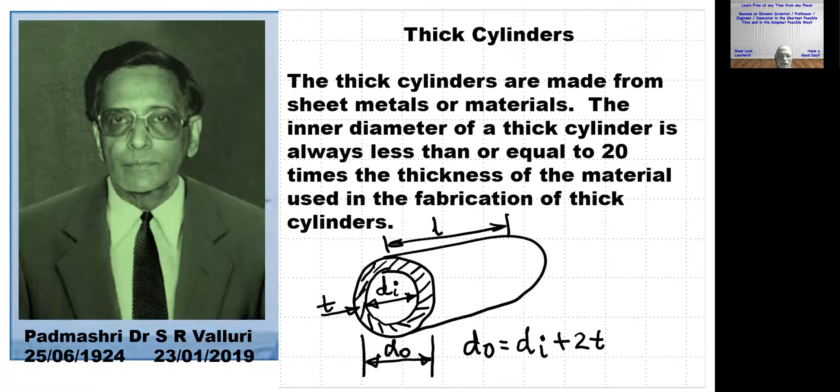Ri is the inner radius of the cylinder, which is half the inner diameter. Ro is the outer radius of the cylinder, which is half of the outer diameter. Px is the radial pressure at any radius x, and Fx is the hoop stress at any radius x.

For solving problems, equations called Lame's equations are used. They are: Px equals b by x square minus a, and Fx equals b by x square plus a.

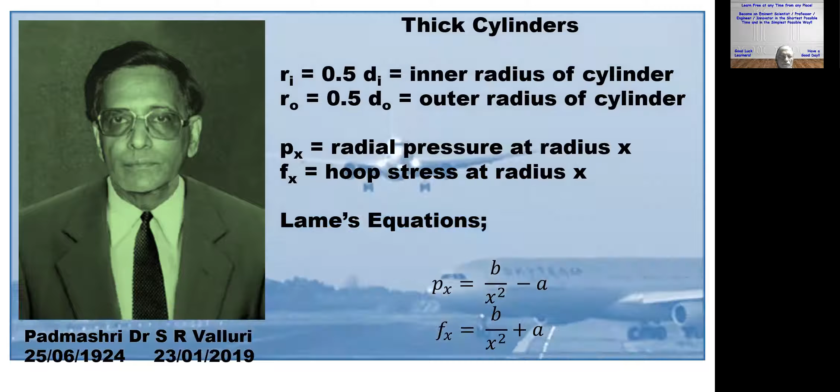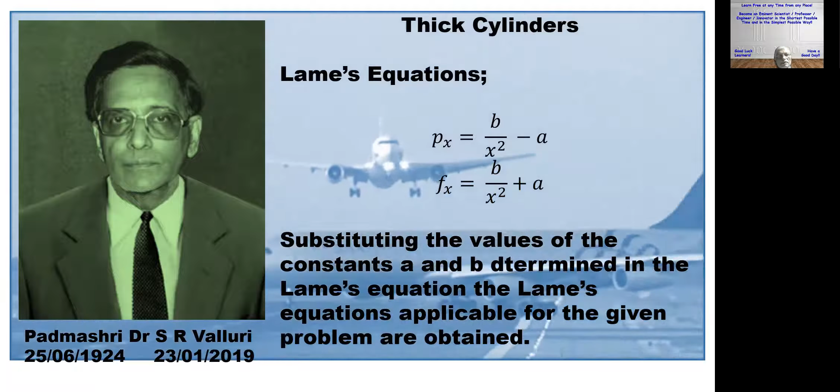In Lame's equations, a and b are constants, to be determined from known conditions in the given problem. Substituting the values of constants a and b determined, the Lame's equations applicable for the given problem are obtained.

As an example, Lame's equation for a particular problem becomes Px equals 281250 by x square minus 62.5, and Fx equals 281250 by x square plus 62.5.

By substituting values of x from x equals Ri up to and including x equals Ro, in convenient steps of increments, the variation of Px and Fx for different values of x are obtained.

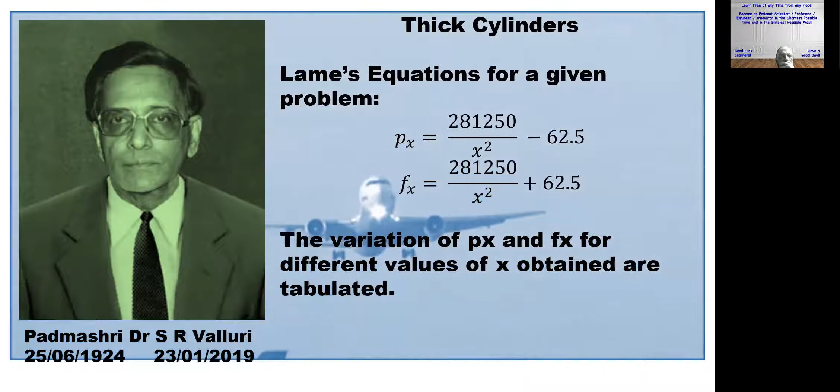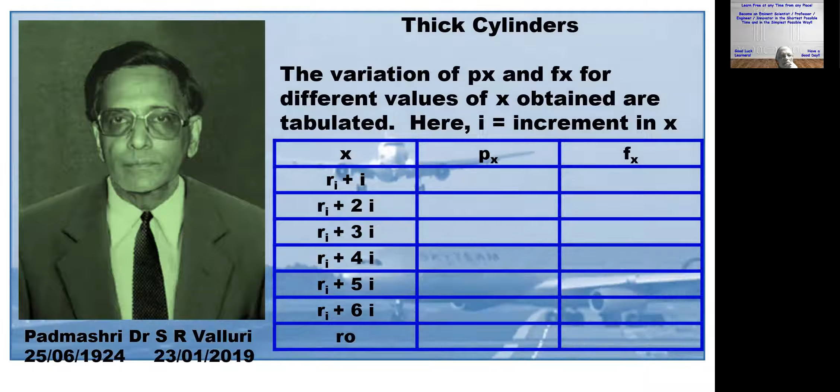The variation of Px and Fx for different values of x obtained are tabulated. Here, I is the increment in x.

When x equals Ri, which is 100 mm, Px is 5 MPa and Fx is 11.4 MPa. Similarly, at the outer radius x equals Ro, which is 160 mm, the corresponding values are Px equals 0 and Fx equals 6.4 MPa. The values of Px and Fx for other values of the radii are shown in this tabulated form.

These variations in Px and Fx can be plotted to get a graphical presentation of the variation of Px, the radial pressure, and Fx, the hoop stress, which vary with change in x along the cross section of the cylinder material.

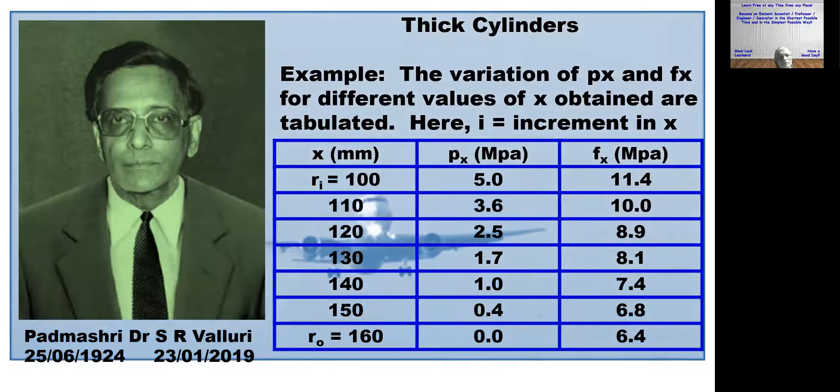An example is like this: a metallic pipe of thickness 60 millimeters has an internal diameter of 200 mm. It carries water under a pressure of 5 megapascals. Determine the maximum shear stress and the maximum and minimum intensities of circumferential stresses induced in the pipe material.

Show the variation of the radial pressure and the hoop stress across the cross section of the thick cylinder.

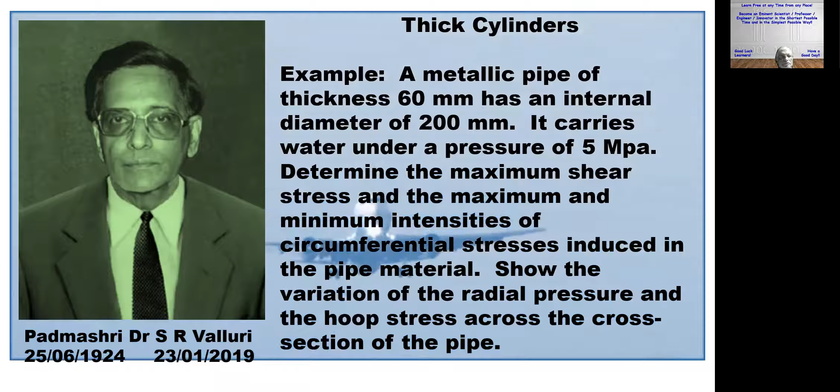From the given data in words and sentences form, the first step is to collect all the data given in the problem, which will be useful in solving it. For example, in the current problem, T, the thickness of the pipe, is given as 60 millimeters, and Di, the inner diameter of the pipe, is given as 200 millimeters.

Ri, the inner radius of the pipe, is 100 mm, since we take the outer radius as the inner radius plus the thickness of the material used for fabrication of the thick cylinder. So Ro, the outer radius of the pipe, becomes 100 plus 60, or 160 mm.

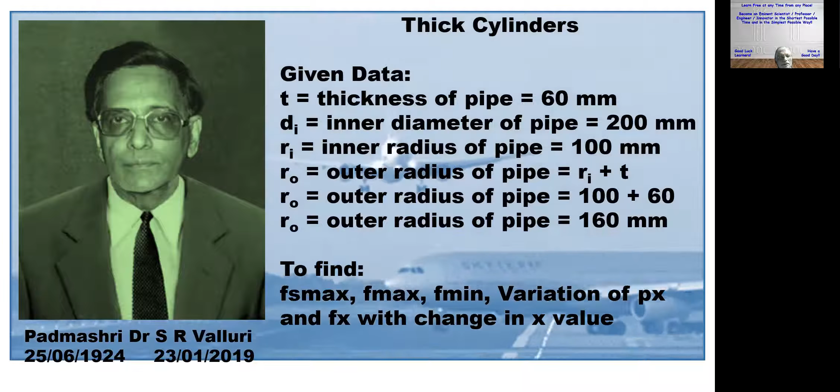It is required to find the maximum shear stress, written as Fs max, and F max and F min, which are the maximum and minimum values of the hoop stress, and the variation of Px, the radial pressure, and Fx, the hoop stress, with change in the x value.

The Lame's equations are Px equals B by x square minus A, and Fx equals B by x square plus A. Known conditions are Px equals 5 when x equals 100 mm, and Px equals 0 when x equals 160 mm.

Here, Px equals 5 MPa is given when x equals 100 mm. Px equals 0 when x equals 160 mm is assumed, because nothing is stated in the given problem about the external pressure acting on the thick cylinder, so it is assumed that the external pressure acting on the outside of the cylinder is 0.

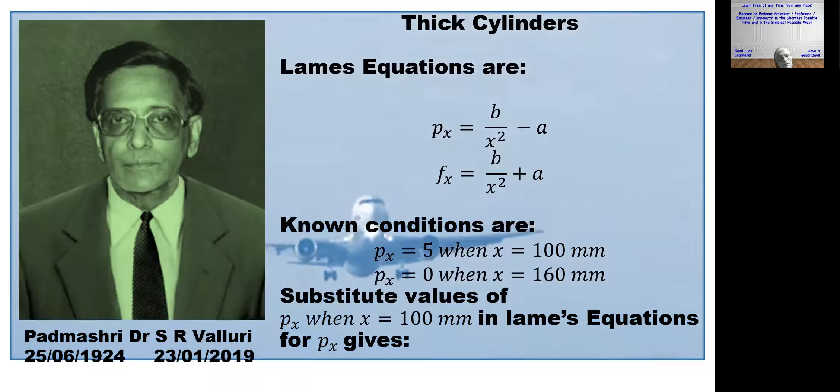Substituting the value of Px when x equals 100 mm into Lame's equation gives: 5 equals B by 100 square minus A.

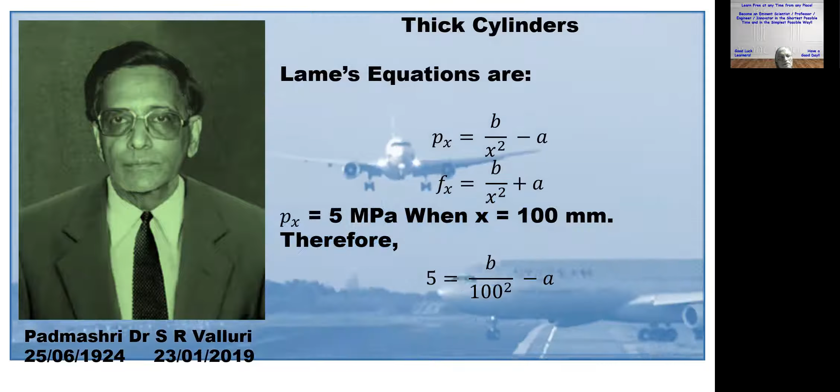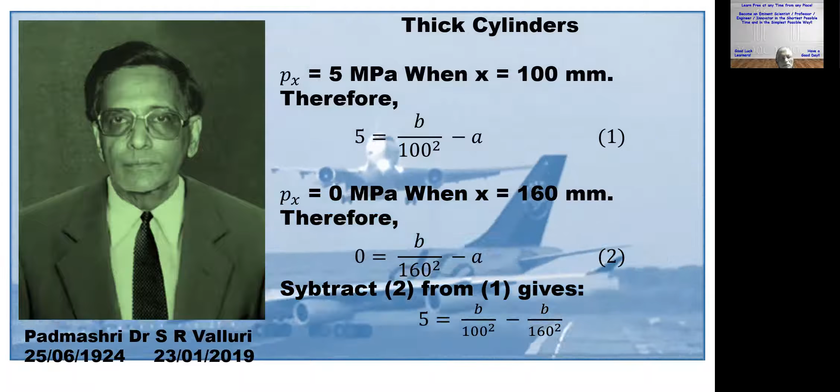Similarly, Px is equal to 5 MPa when x is equal to 100 mm, therefore 5 is equal to B by 100 square minus A. And Px is equal to 0 MPa when x is equal to 160 mm, therefore 0 is equal to B by 160 square minus A. Now subtracting equation 2 from 1 gives 5 is equal to B by 100 square minus B by 160 square.

Taking B as common factor, we get 5 is equal to B into 1 by 100 square minus 1 by 160 square, or 5 is equal to B into 160 square minus 100 square by 160 square into 100 square.

This can also be written as 5 is equal to B into 260 into 60 by 160 square into 100 square. What is actually done is A square minus B square is written in the form of A plus B into A minus B. A plus B becomes 260 and A minus B becomes 60, that is 160 plus 100 is 260, and 160 minus 100 is 60.

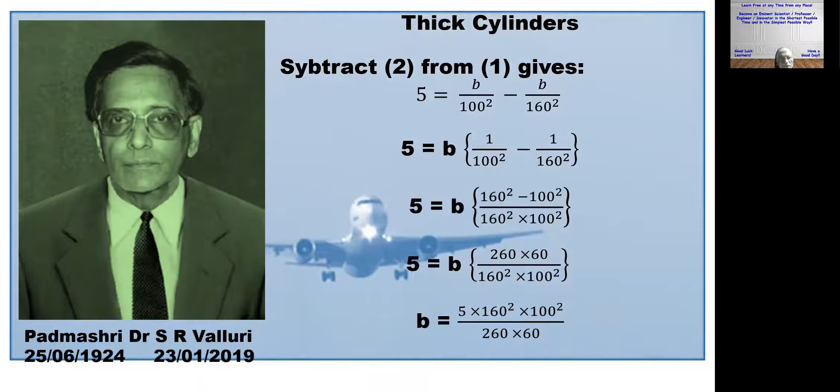Therefore, rewriting, the value of B is written as 5 into 160 square into 100 square divided by 260 into 60, which is in the denominator. Subtracting equation 2 from 1 gives B is equal to 82051.3.

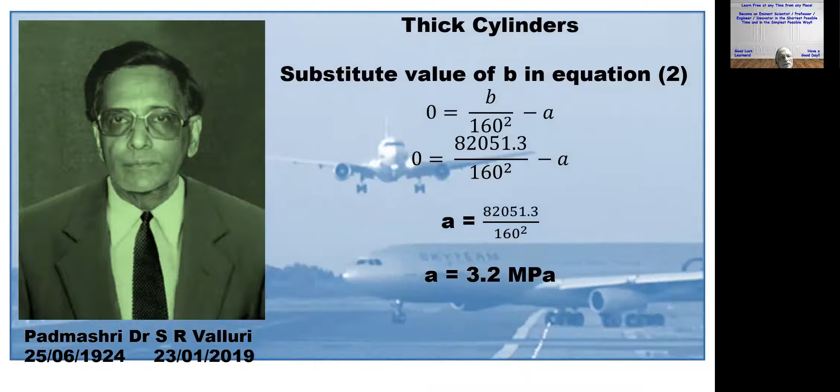Substituting the value of B in equation 2 gives 0 is equal to B by 160 square minus A, or A is equal to 82051.3 by 160 square. So therefore A is equal to 82051.3 divided by 160 square. This becomes, on simplification, A is equal to 3.2 MPa.

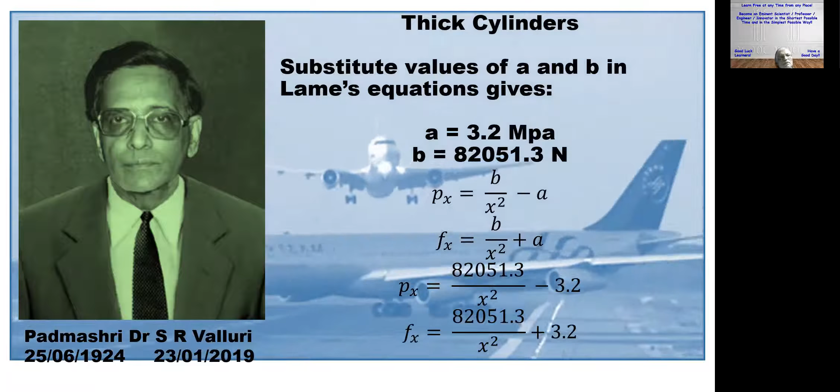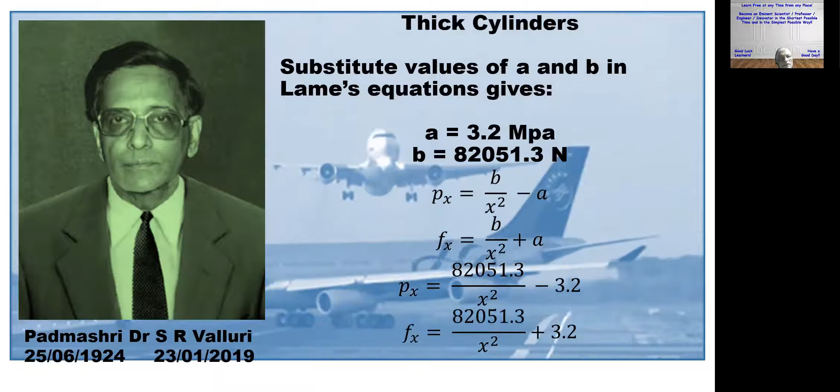Substituting the values of A and B in the Lame's equation gives A is equal to 3.2 MPa and B is equal to 82051.3 N. So Px is equal to B by x square minus A, and Fx is equal to B by x square plus A. This becomes Px is equal to 82051.3 by x square minus 3.2, and Fx is equal to 82051.3 divided by x square plus 3.2.

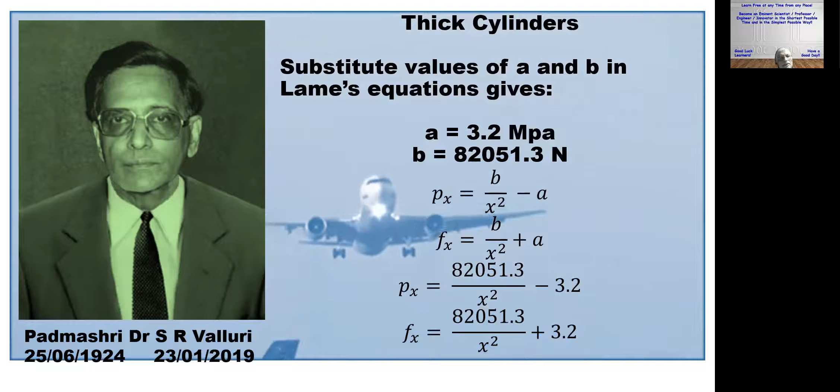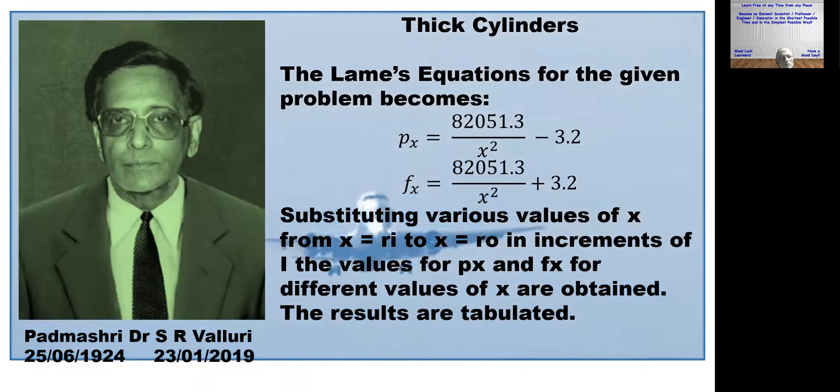Substituting various values of x from x is equal to Ri to x is equal to Ro in increments of 10, the values of Px and Fx for different values of x are obtained. The results are tabulated. Values of Fx and Px for different values of x are tabulated here.

From the table, it is seen that when x is equal to Ri, which is equal to 100, the radial pressure Px is 5 MPa and the hoop stress Fx is 11.4 MPa. Similarly, at x is equal to Ro, equal to 160 mm, Px, the radial pressure, is equal to 0 at the outer surface, whereas the hoop stress at the outer radius is 6.4 MPa.

From the table, it is seen that the maximum hoop stress occurs at the inner radius, which is 11.4 MPa, and the minimum hoop stress occurs at the external radius, which is 6.4 MPa. Between the inner radius and outer radius, the values of the hoop stress Fx for various values of x are tabulated here. There is a continuous decrease in the value of the hoop stress starting from the inner radius towards the outer radius of the thick cylindrical shell's cross section.

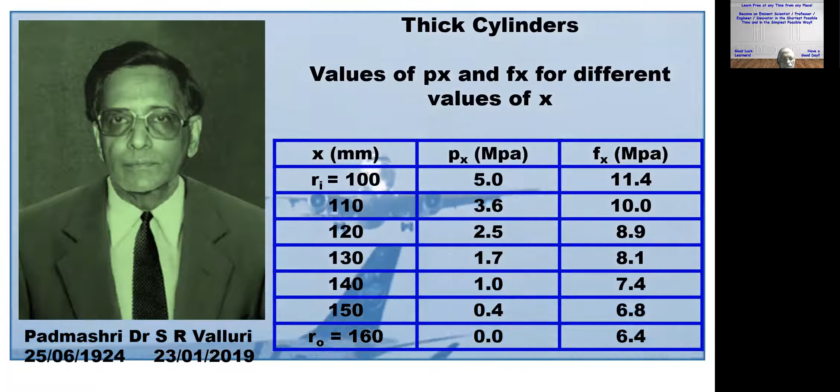So this is about how the problems on thick cylinders are solved.

Now, using the tabulated values or results, it is quite possible to make a plot and produce a graphical representation indicating the variation of the radial pressure and the hoop stress with change in radius across the thickness of the cross section of the thick cylinders.

So this one we will take up in the next class, where we will solve several problems of different kinds which normally appear in all university and technical board examinations, either of polytechnics or engineering colleges, deemed universities, and professional institutions which conduct equivalent degree level examination courses.